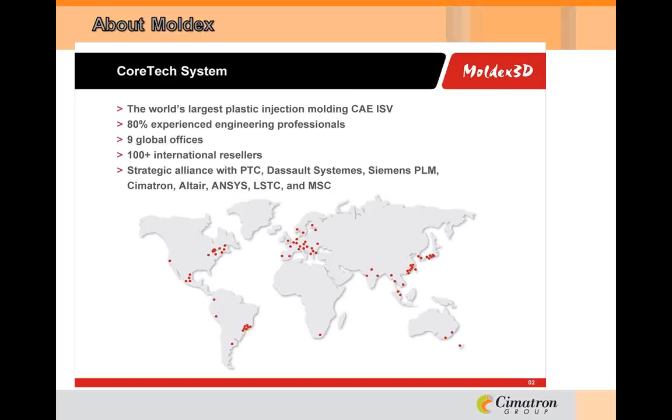Okay, thanks, Ralph. Moldex has a rich history of innovation and growth as a true industry leader. After combining various resources from academics, industry specialists, and customers, the predecessor of Moldex 3D was first released in the early 90s. It is believed to be the world's first CAE program to run on a Windows platform. In 2004, Moldex 3D was the first injection molding CAE to support parallel computing.

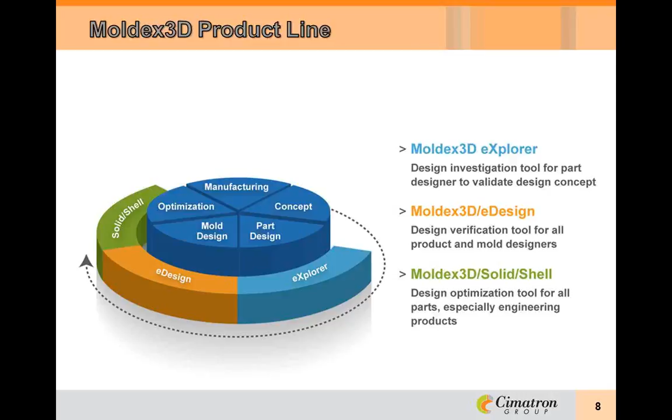Moldex 3D has 3 products that cover a wide range of CAE needs. Starting with Explorer, we provide product designers with CAD-embedded tools for exploring various design concepts. When designing molds, eDesign offers mold designers an easy-to-use interface with accurate computations to verify complex runners, gating systems, and cooling channels, as well as predicting warp and other defects during the molding process. Moldex 3D Solid Shell offers more advanced tools to decrease your product-to-market time and to improve the quality of the design with comprehensive analysis results. Today's focus will be on the mainstream product, eDesign.

These 3 products present a single unified platform for all designers and CAE specialists at every stage of the product development cycle. It integrates all of your innovation, efficiency, and productivity to reach your design expectation and product optimization.

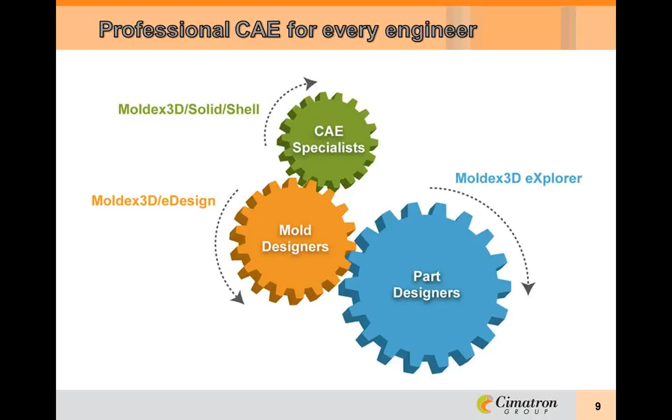In the design phase, there are several often difficult key decisions which product designers must make. For example, how to design the proper wall thickness and how to deal with thin wall products. What potential defects will be found during the tool design and molding process? These questions are extremely complicated and frustrating for product designers. What's worse is that they often do not have any tools to prove out their design concepts. Many times, the only way out for them is to hold the tool builder responsible for these corrections.

My background is tooling, and I happen to know the tooling guys are so nice, they often do this for free anyhow, right? The truth is, these problems should have been solved before the mold design phase. The reality is, both of them definitely need to think about these issues.

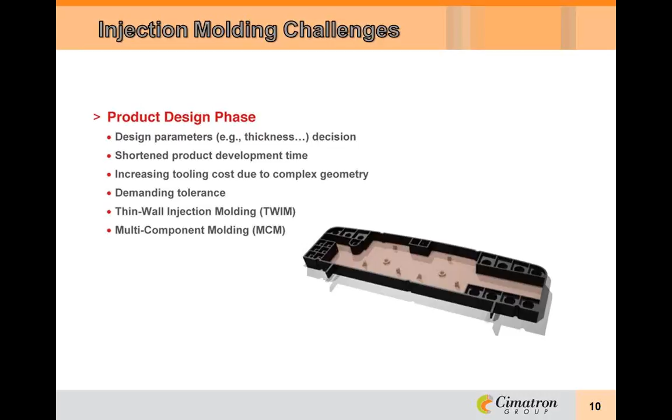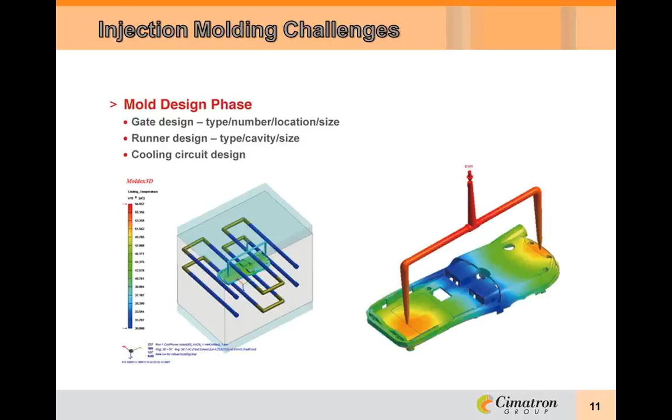The primary tasks of an injection mold include the accommodation and distribution of the melt, precise temperature control to properly solidify the material, and ejection of the molded part. Additionally, a mold has to provide good tooling or steel conditions and mechanical functions such as slides and lifters, all while holding tight tolerances on the part after the warpage and shrinkage of the solidification of the material. This places an enormous challenge on the mold designer. eDesign supplies the tools to help evaluate the size and layout of the runner system, gate location and type, adequate cooling circuit, and appropriate number of cavities.

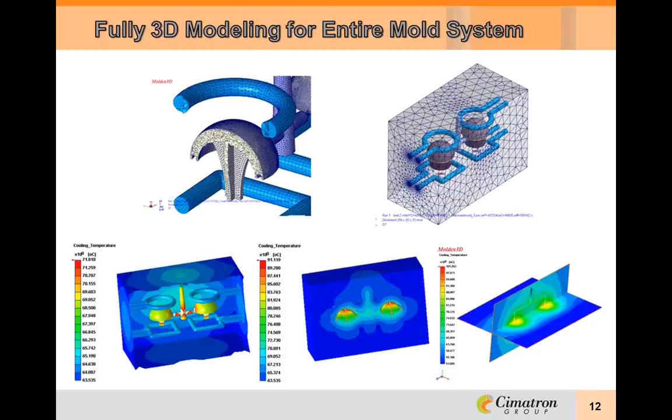Taking some of the guesswork out of the design process is made further efficient since eDesign can take CAD data directly from your 3D mold design in order to simulate the actual process conditions before any steel is ever cut. As you will see later in this presentation, with parallel computing ability and the few required steps to get to the simulation, you will see that there is very little time invested for maximum return of prediction and knowledge.

In addition to the challenges that I just mentioned, under the best of conditions even, injection molding is still a complex technology that also introduces these challenges. If not handled properly, there may exist various flaws either by defects in the mold or improper mold process settings. And here we see examples of a short shot. Of course, a short shot is a molded part that's not completely filled.

Burn marks, black or brown burnt areas on the part, usually located at the furthest point from the gate where the air is trapped. A weld line, also known as a knit line, where the flow front meets. Sink marks, which would be localized depressions, usually in the thicker areas of the part. Warpage, which of course is just the part that's been distorted during the shrinking process. And flash, which would be excessive material, usually in thin layers that leak out at the parting line and of course exceed the normal part geometry.

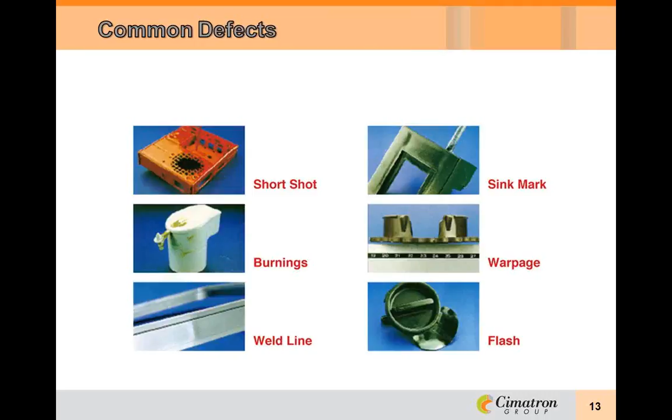With the CAE approach, a process simulation is launched before the prototype mold is ever constructed. In other words, prototyping is done on the computer. In the design phase, a part designer evaluates the influence of material selection and processing on the various part specifications. The analysis is based on physics principles and actual conditions, rather than a rough estimate from handbooks. Part wall thickness can be optimized to facilitate its processing feasibility and product performance. Part design is very flexible since the real mold has not been built yet.

In the mold design phase, the design is further refined by adding molding considerations. Runner system and gate are designed according to the process dynamics simulation. Cooling system is optimized to shorten the cycle time and improve part quality. The molding trial on the computer is possible before the actual molding trial is ever conducted. In this way, mold construction has not begun until the molding trials on the computer meet the requirements. The interrelation of part design, material selection, part performance, and processing is all taken into account. Modification of part design and mold design is flexible and concurrent.

After the mold design is accomplished, the mold is constructed and actual molding trials are conducted to evaluate the mold's feasibility. The time and materials, also known as money, used in molding trials and part testing are minimized since the design has been comprehensively evaluated. Production can then begin and the product development is finished.

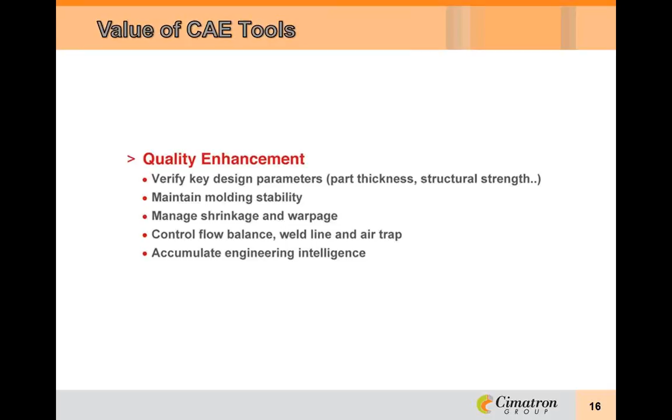In fact, unprecedented global competition is pressing industries to meet various customer demands for better quality, lower cost, eco-friendliness, and so on. People keep looking for more cost-effective and smarter ways to improve the efficiency and profitability. Finding problems and learning solutions from trial and error is a traditional approach and very cost-consuming. To effectively eliminate uncertainty and associated financial losses, an efficient engineering tool becomes more and more necessary to increase competitiveness.

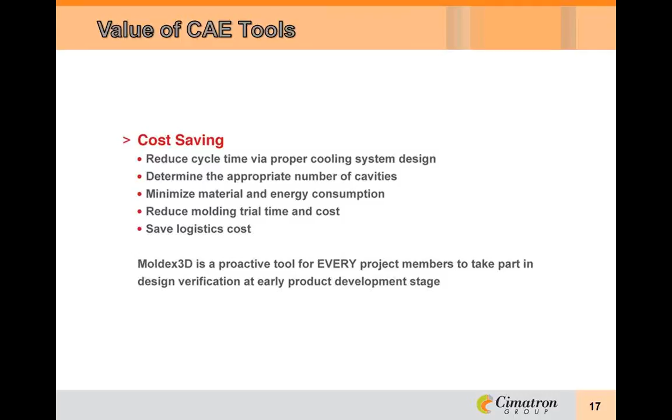By simulating the filling process of injection molded parts, Moldex3D ensures both originality and manufacturability in the design and molding phase. Design teams can easily use Moldex3D as a collaborative tool to identify potential problems and solutions.

Although Moldex3D is incredibly powerful and accurate, it is surprising how easy it is to use. There is no mesh preparation. The part model is simply imported as an STL, and the mesh is generated automatically. The runner and gates can be drawn in eDesign or imported either as STL or wireframe, which would permit parametric attributes to be assigned inside eDesign, which means that the runner, gates, and water circuit diameters can all be modified without the need for data exchange.

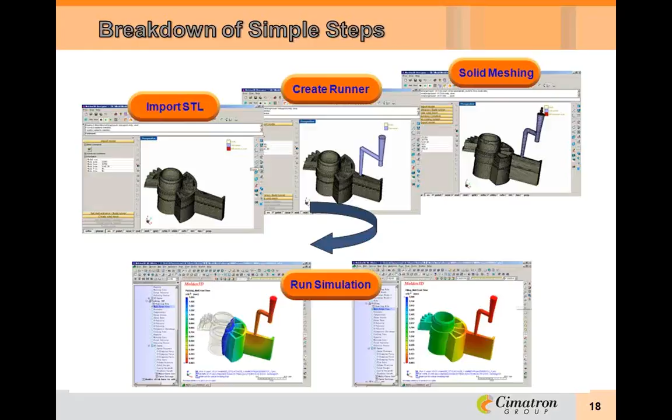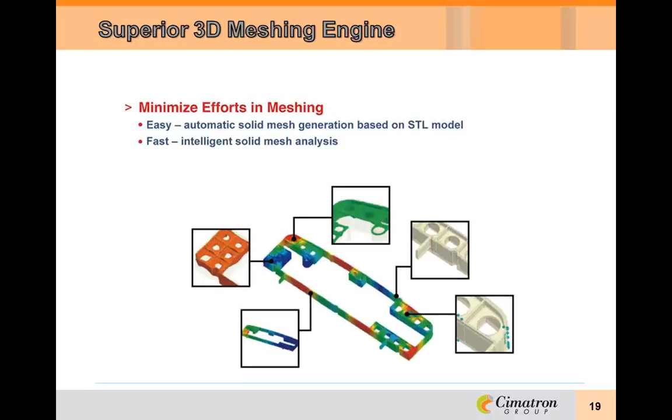eDesign provides the most friendly pre-process environment. The most advanced meshing technology is employed to help users generate true 3D solid mesh of outstanding quality without the need for any pre-process work.

eDesign Runner Wizard provides powerful yet intelligent guidance for your design. Now you can define runner systems and optimize the mold design with ease.

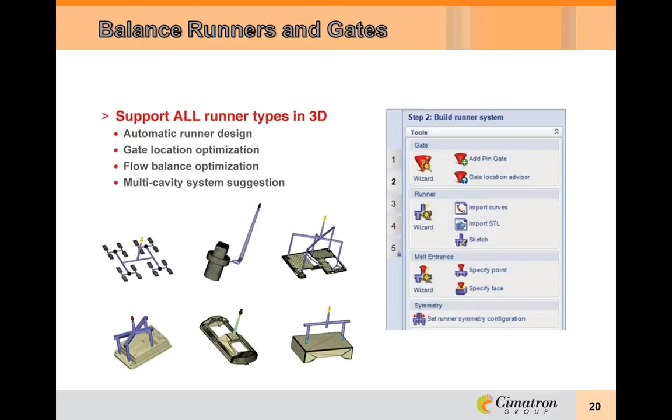eDesign also offers a cooling channel wizard. Users can quickly define the cooling circuit and configure it inside eDesign as an alternative to importing it from another CAD system. More advanced options are also available to enable customization according to the user's requirements, to automate the creation of an entire cooling system and subsequently speed up the optimization.

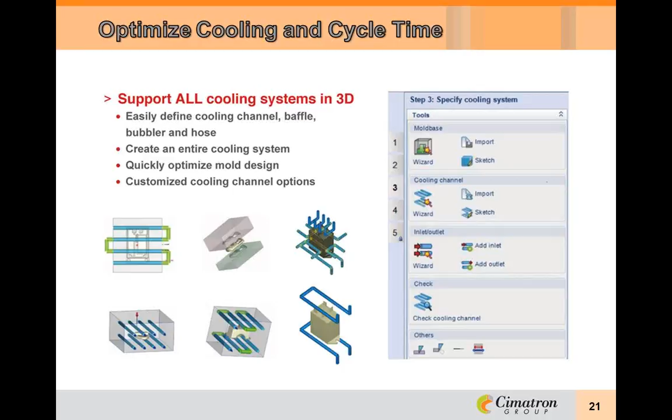Next, let's have a closer look at the Moldex 3D modules. Moldex 3D standard modules are flow, pack, cool, and warp. Advanced modules are fiber, multi-component molding, hereafter referred to as MCM, reactive injection molding, optics, viscoelasticity, and injection compression molding.

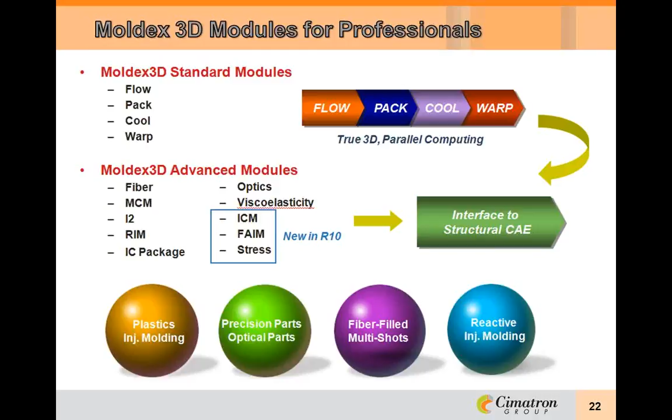Moldex3D Flow gives you accurate insight into solid plastic flow behaviors from a macro view to a micro view, such as fountain flow, inertia effect, and gravity effect. Users can better understand how the solid melt flow progresses, accurately identify where the knit lines are, and examine short shot problems. If more than one gate is used to fill a part, you will see in different colors the material contribution from each gate and where they meet.

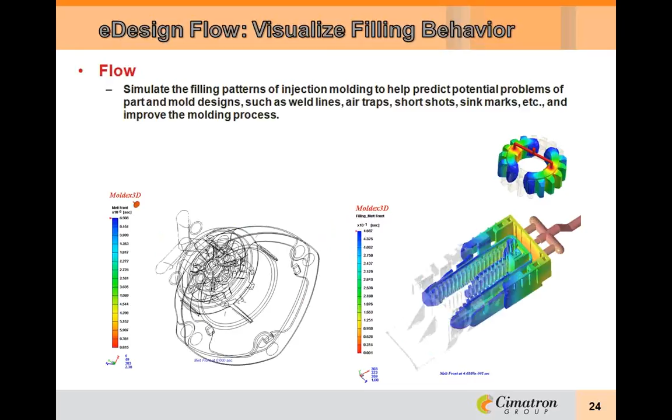eDesign Pack incorporates material compressibility, or PVT, change to account for the density variation and melt flow behaviors in the packing process for thermoplastic materials. Its true 3D technology can help you precisely determine gate freeze time, efficient packing time, and proper packing pressure to minimize areas of high volumetric shrinkage.

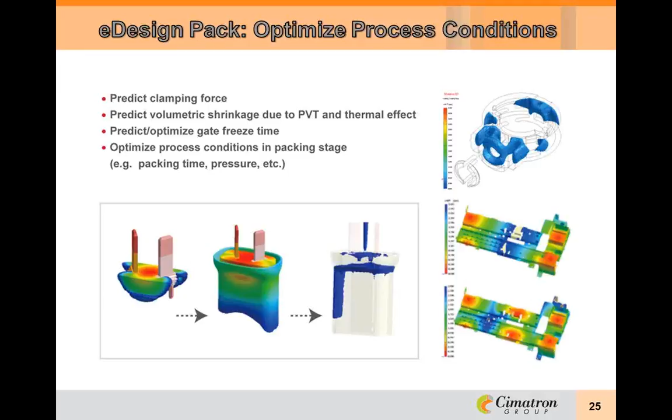Here we can see the packing volumetric shrinkage.

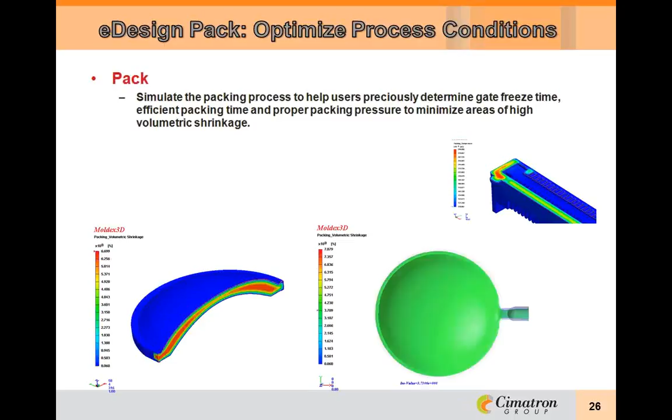eDesign Cool, with its true 3D analytical core, can accurately analyze the mold temperature, the efficiency of cooling channel layout, and the required cooling time in the design phase. It is a useful tool to detect potential defects in the mold cooling system, such as unbalanced cooling, hot spots, and prolonged cooling time due to poor cooling efficiency.

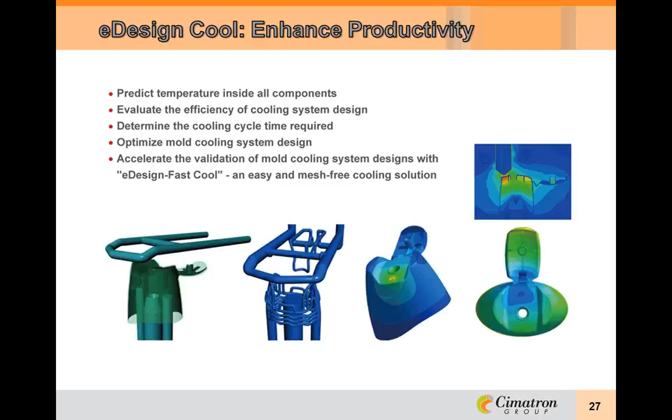You can accurately evaluate the cooling efficiency to further optimize the cooling system and reduce cycle time. Here we see dynamic slicing through the part in order to look for hot spots in the part. This will help us fully evaluate the cooling system.

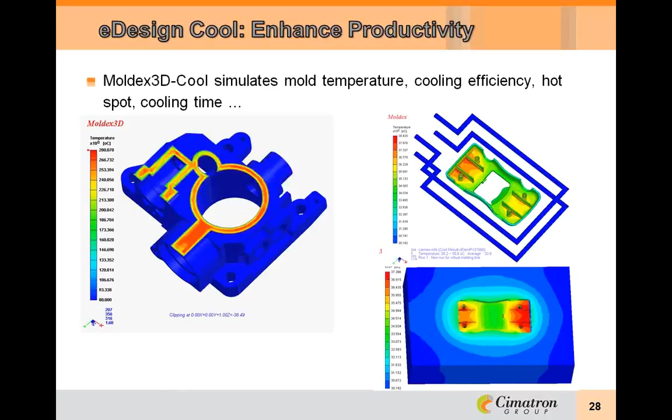eDesign Warp provides users a true 3D simulation tool to anatomize the causes of shrinkage and warpage and further control these defects before the mold is built. You can easily and efficiently improve the part quality and optimize design.

For fiber-filled material, eDesign Warp incorporates fiber composite theories and the fiber orientation results from eDesign Fiber to predict its anisotropic shrinkage and warpage.

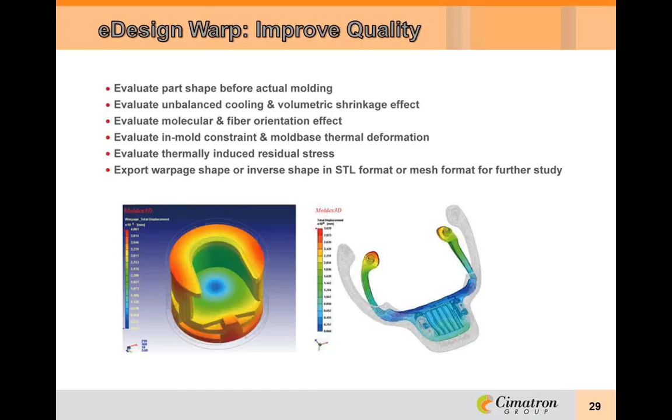Here we can see a scaled-up animation of the warpage behavior. I can't help but think of a specific automotive headliner part that I worked on just a few years back that could have really benefited from this kind of prediction. We knew it was going to warp, and we tried to cut the steel safe, but as I recall, I think that we recut that mold at least 4 times before we finally produced a part within spec.

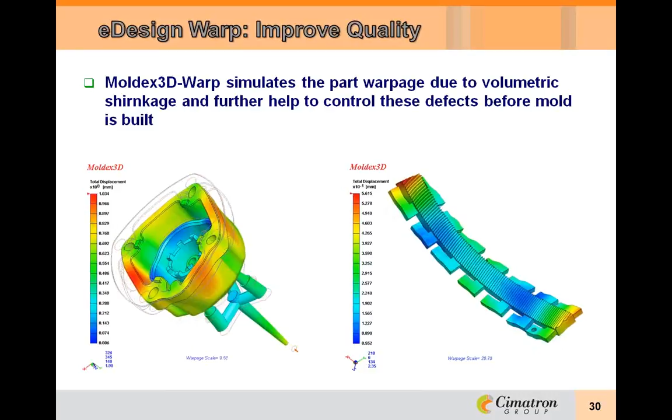Moldex3D Fiber accurately simulates the 3D fiber orientation in the mold filling process and further calculates the process-induced anisotropic thermomechanical properties of fiber-reinforced plastic parts.

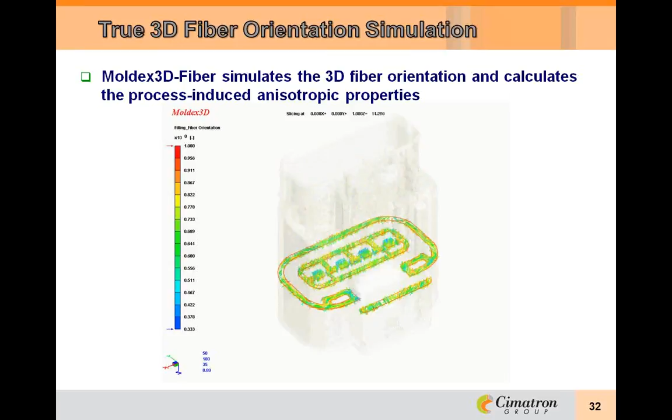Users can understand the 3D orientation of fiber and further control the anisotropic shrinkage of fiber-reinforced parts. Here again, we see dynamic sectioning of the part in order to better understand the fiber orientation. Here we can see the type of influence that fiber has when producing this part.

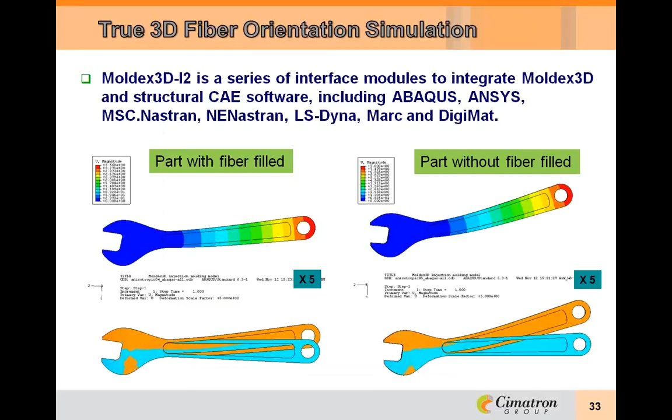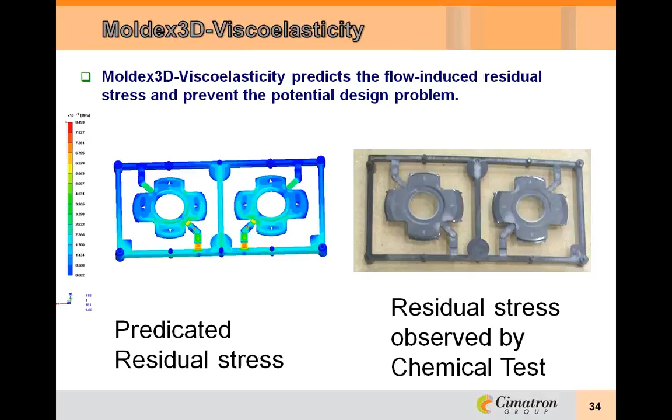eDesign multi-component molding gives you a powerful tool to accurately analyze the interaction of different components and further optimize product design. Users can freely model any kind of metal or plastic inserts and perform comprehensive analysis.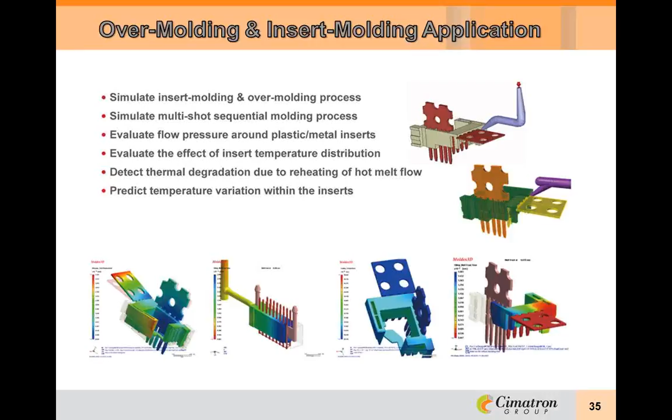With eDesign MCM, you can predict the prolonged cooling time, asymmetric shrinkage, and two-color or overmolding processes, and consider warpage of the different material combinations.

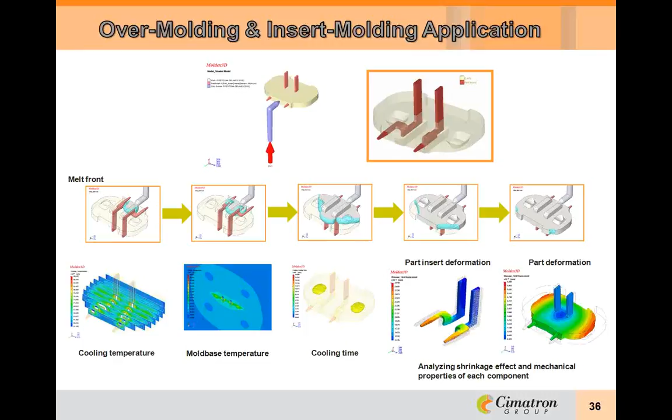Here is an example of the MCM where it's looking at steel inserts around the plastic and checking them for deformation.

Here's another animation that shows the warpage behavior during the overmolding process.

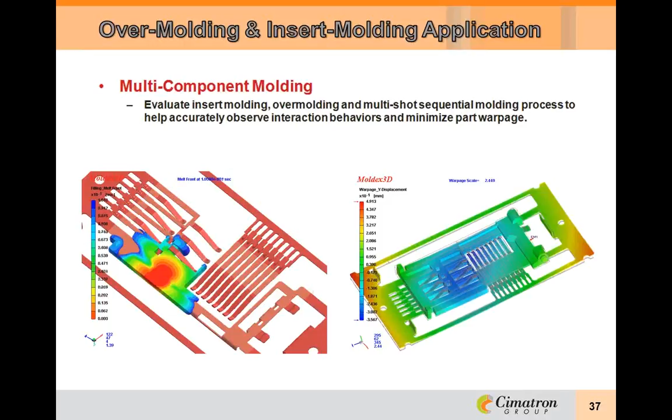Moldex3D is the only CAE solution which supports parallel computing for flow, pack, cool, warp, fiber, MCM, and so on. By utilizing the strength of multi-core computers, the time required for analysis is greatly shortened. Moldex3D parallel computing technology supports PC clusters as well.

Here we can see another demonstration of the software's accurate prediction of what looks like a venting issue. Here we can see progressive short shots and accurate prediction of the filling pattern.

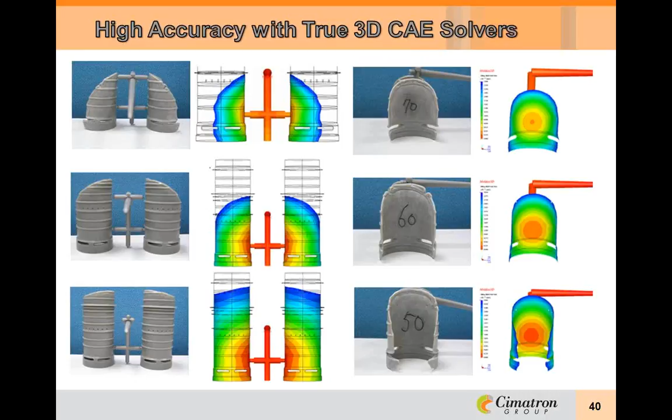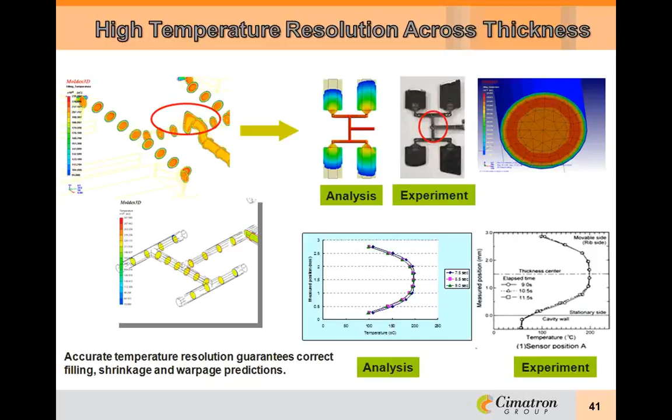Moldex3D not only simulates the part in true 3D, but also the runner system. You might question why this is important. The reason is because of what is called the shear heating phenomenon. While the material is flowing through the runner system, friction is creating heat. This heat does have an impact on material flow, and the next few slides will demonstrate this.

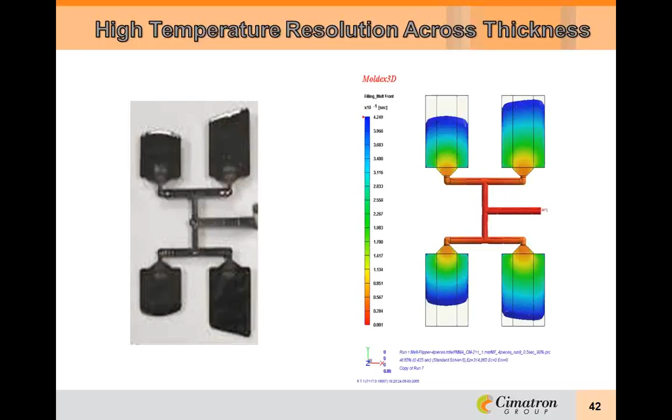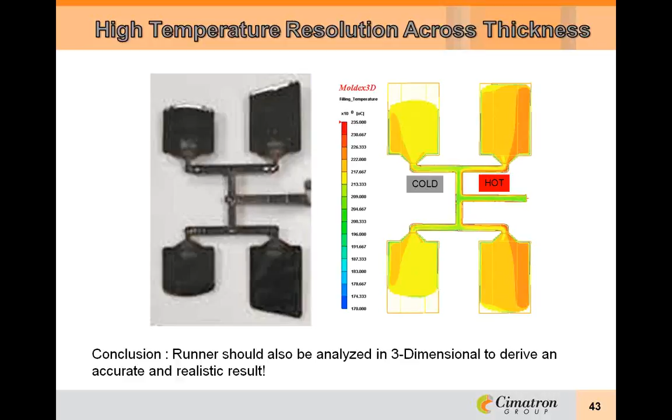The picture on the left is the left half of an actual shot of an 8-cavity mold. The simulation picture on the right predicted it due to temperature influence from the runner. You can see where it says cold and hot; that temperature difference causes the inner cavities to fill faster. So the conclusion here is that the runner should also be analyzed in 3D to derive an accurate and realistic result.

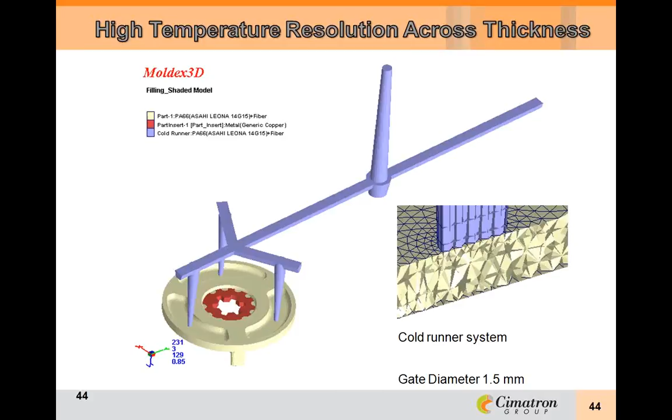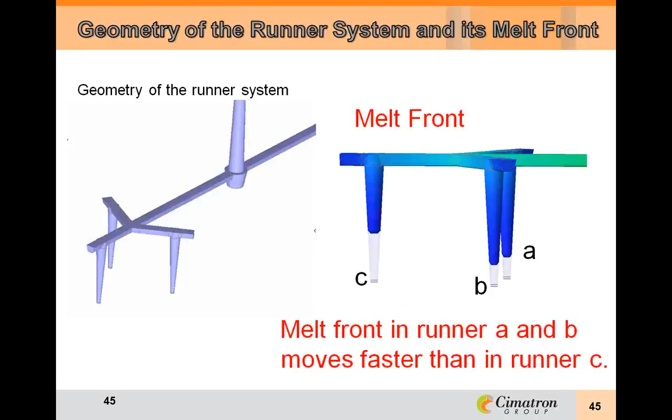Here again we see the accurate prediction of flow pattern when compared to the real molded parts. This could only be achieved by calculating the shear heating in the runner system. These are the kinds of variables that are often not considered in traditional mold designs and cannot be predicted accurately without 3D CAE software.

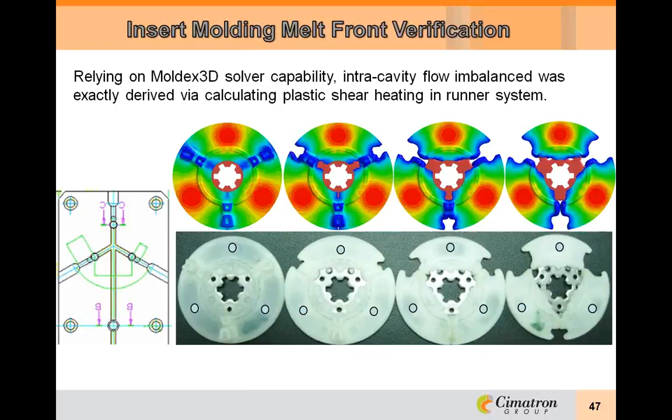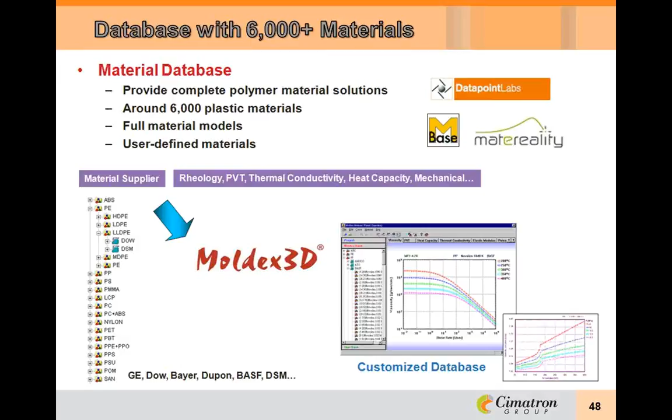An extensive material database comes standard with Moldex3D. Any materials that are not in the database can be added easily.

Best-in-class technical support can be accessed globally. The North American office is in Novi, Michigan.

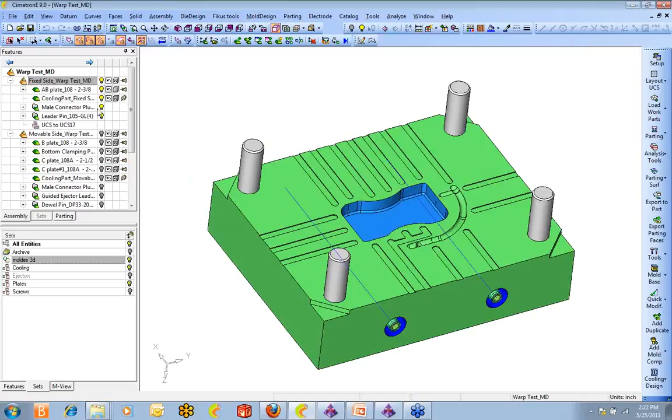Okay, next let's take a look at some examples. The first thing that I want to show is what I started with in Cimatron. I have a 3D mold design here, and let me turn a few things off and on real quick.

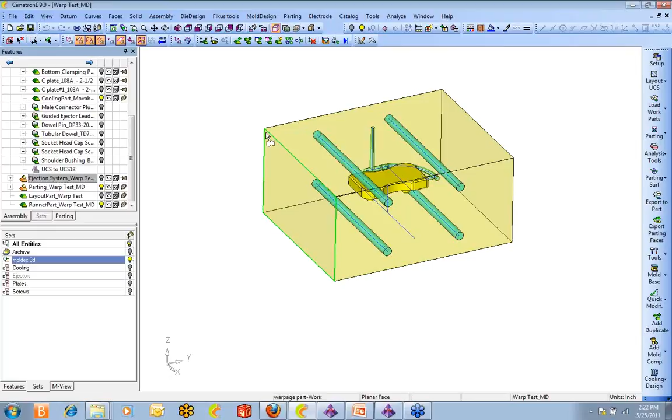All right, so I've got a 3D design ready, but what I'm actually going to take into Moldex is this. I'm taking a bounding box that represents the A plate and the B plate, the cooling circuit, of course the part, and the runner system. But in this case, I only took the wire frame. The only thing I took as an STL was the part, and everything else was wireframe in order to set the parametric attributes inside eDesign.

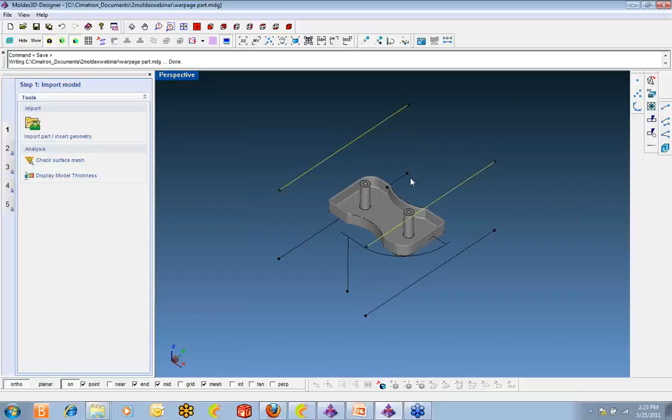Let's take a look at that. Okay, so here in eDesign, we have the part that I brought in as an STL, and of course the wireframe. So I'm going to pick on the cooling circuits first, and we're going to assign an attribute as a cooling channel, 0.438 inch diameter.

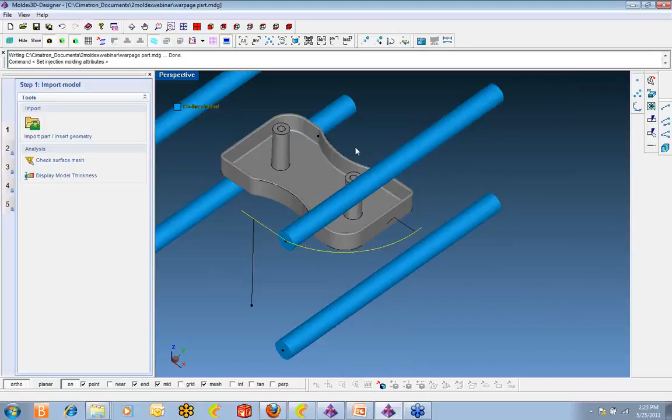And next, let's take the runner. We're going to assign the attribute of cold runner, and this diameter will be 0.250. And this one also is a cold runner; the diameter is 0.188. This one as well. And lastly will be the gate.

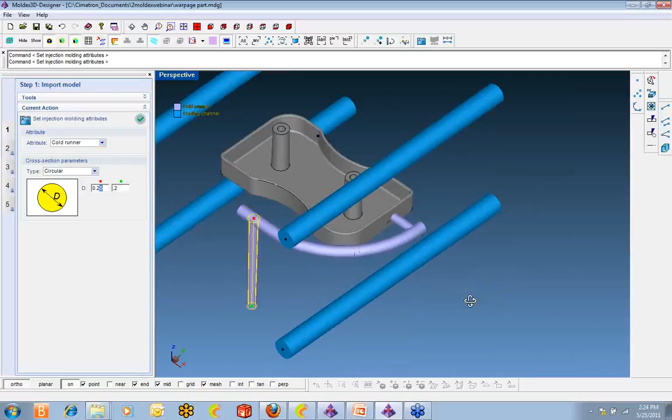Okay, and now we're going to just go through some of these steps. Yeah, I forgot the melt entrance. And the mold base—the mold base, again, is just a size representation of the A and the B plate.

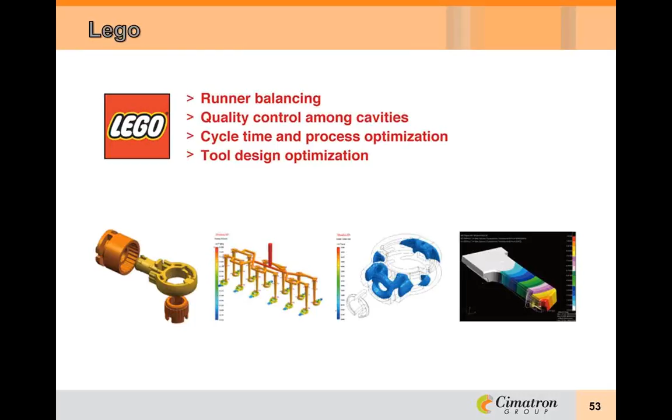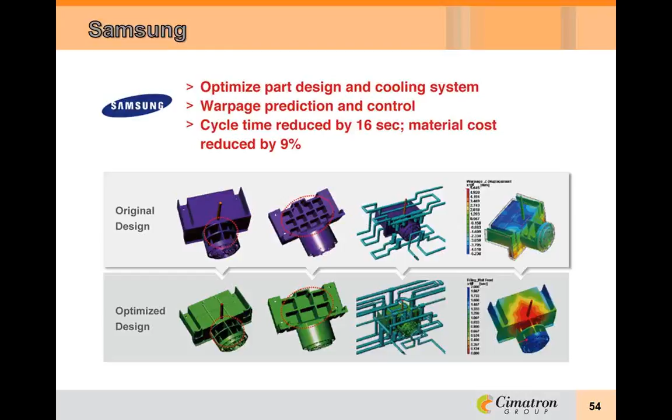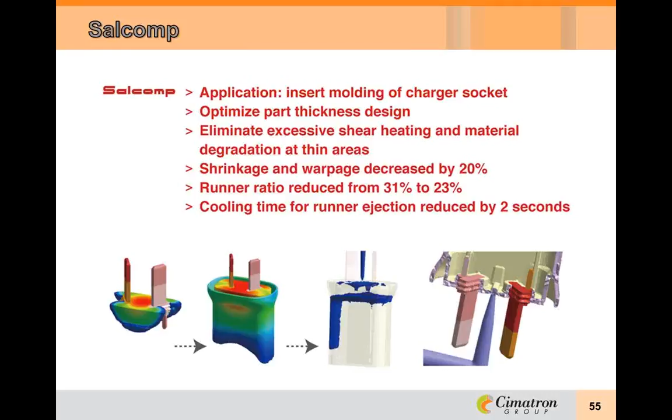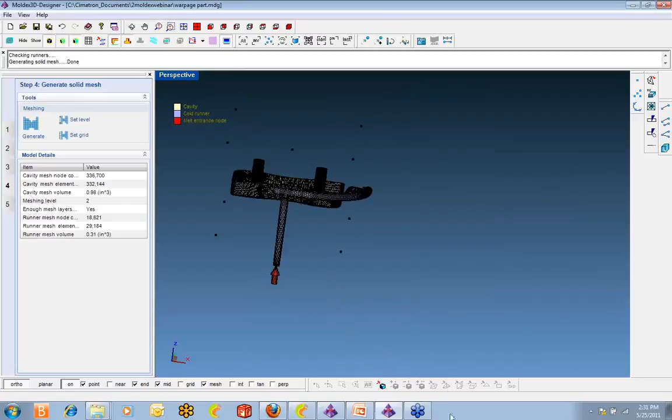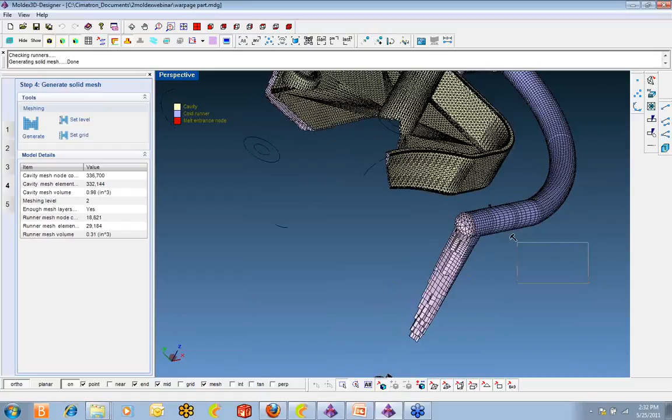Okay, so we're going back into the eDesign, and we're going to look at the mesh that was created automatically, and I'm going to dynamically clip across the mesh and show you what it looks like. Here you can see the 3D filling inside of the mesh as we clip it away. And of course, the runner is also done in 3D.

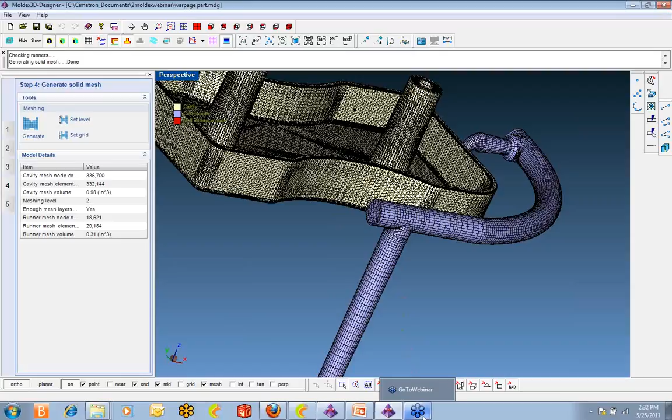So there's really nothing more to do with this one other than save it and take it into the project. And that's what I'm going to do now is open the project. Now, we actually did do 2 different runs with this part. I want to show a few things on run number 1, and then we'll talk about what we changed, and then I'll show you run number 2. So first, let me go to run number 1.

I'm going to click on filling, and we're going to view the filling pattern in this model. What we're going to be looking for is temperature problems and warpage in this run. Okay, so let's have a look at the filling pattern.

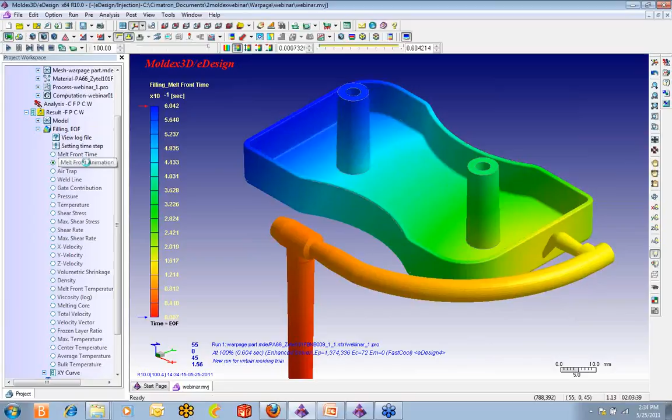Next, we'll look at the melt front animation. And this will show us the air traps.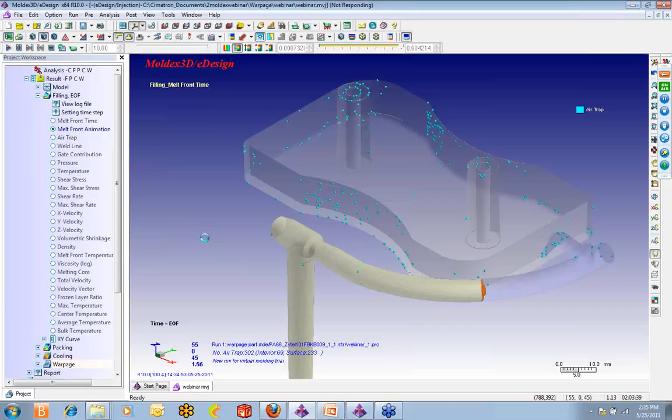Next, we're going to look at warpage. Here you can see the X displacement, X being the longer axis. On the chart, we're talking about 1.6 millimeters. So this part is not being adequately cooled, and therefore there's much more deformation than we would like to see.

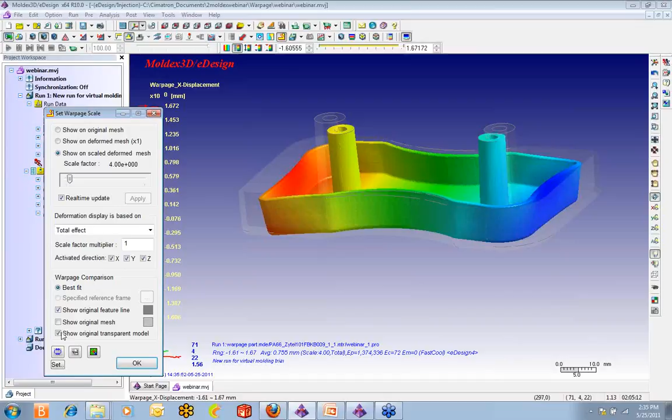We can animate this one as well to exaggerate what that looks like. You can see how the part will shrink and warp.

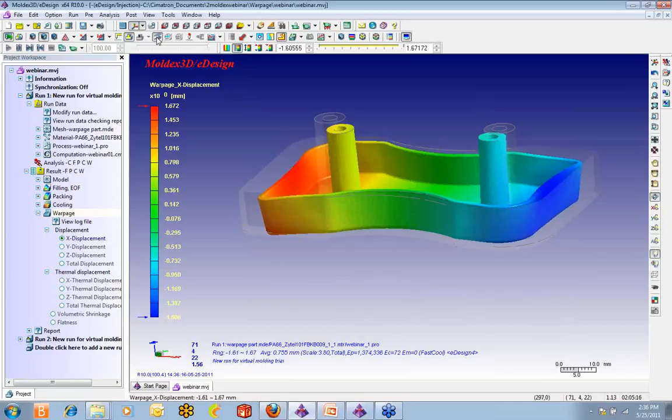Okay, now let's have a look at the cooling lines on this one. You can see that we don't have any cooling in the center of the part. In fact, we'll have a look at the temperature range real quick before we go into the second run.

Now, what we really want to look for on this part is a difference in heat from the inside of the part to the outside of the part. You'll notice that the back side of the part is blue and green, ranging from 90 to 100, and the top of the part is more yellow, which is like 120. So it's a pretty big difference, and potentially a problem. Well, evidently it's a problem because we're seeing it in the warping stage.

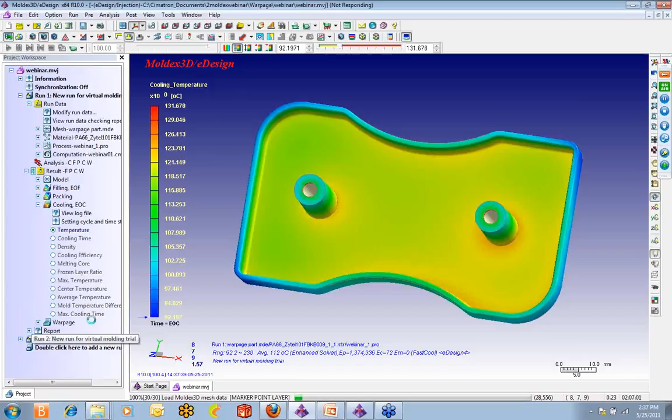So now let's have a look at run 2, and we'll show what we did to improve it. Here in run 2, you can see that we added another line in the baffle to try to bring more cooling closer to the part. So let's have a look at the cooling and see what the difference is with this one.

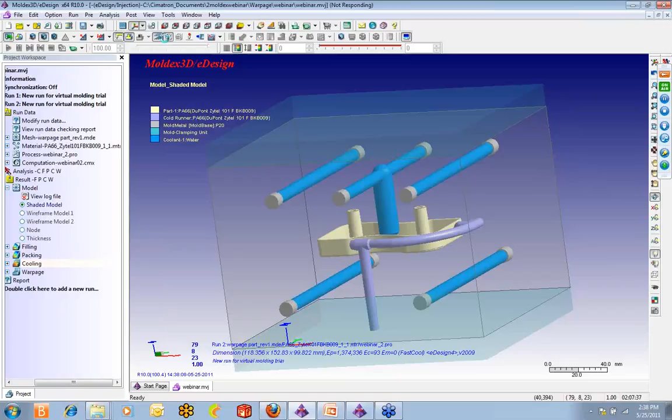Now as we interrogate the temperature, we'll see that there's not as much variation from the bottom of the part to the top of the part, and of course it's being better cooled by the baffle. And now if we consider what the warpage is like as a result, we'll compare the two.

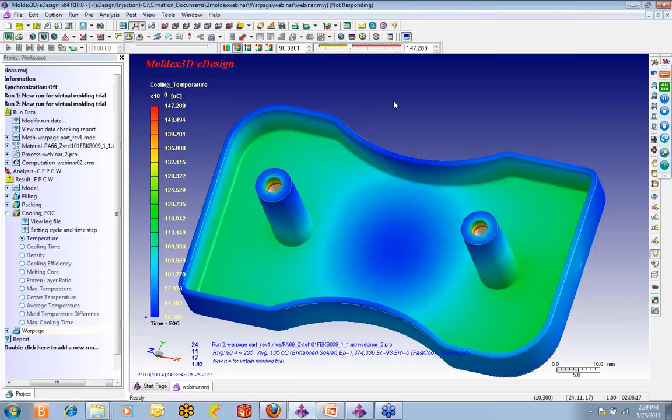Here we can see that at the worst case, we're at 0.25. So we went from 1.5 mil to 1/4 mil in warpage result. It's a dramatic difference.

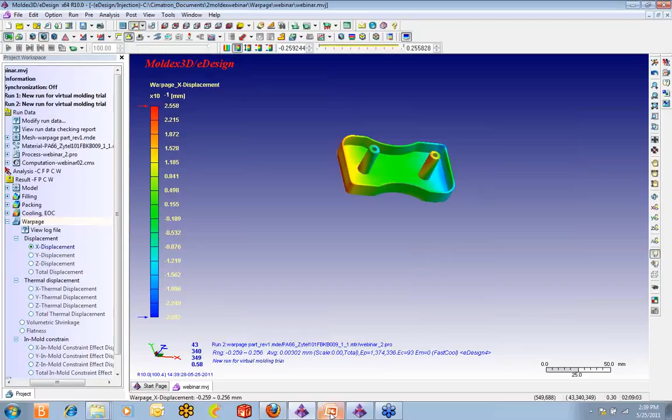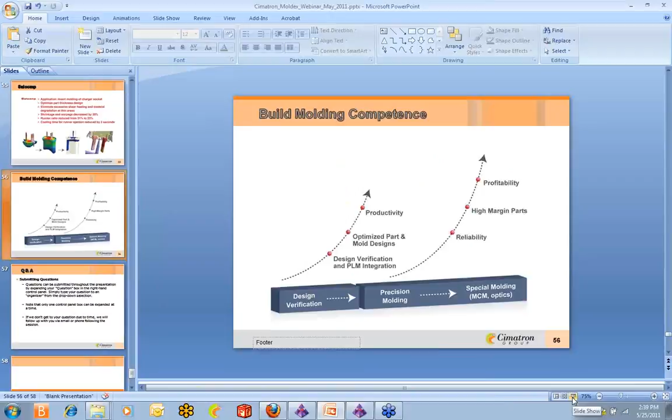All right, now we'll go back to the PowerPoint for a second here. In closing, the concept is simply that if both product and tooling designs are verified early enough in the design stage, it will help to eliminate unknown issues and optimize the entire injection molding process, which leads to higher margins and shorter delivery times. This can become a real competitive advantage over those who decide to stay with the traditional trial and error approach.

For tool makers, there is also the added benefit of being able to provide such a service. For a long time, CAE software was too cost prohibitive for tool shops. Now, however, it is much more affordable and will likely become commonplace in the not too distant future. Cimatron understands this and wants its customers to be on the leading edge of technology, which is why we wanted to bring these ideas to your attention.

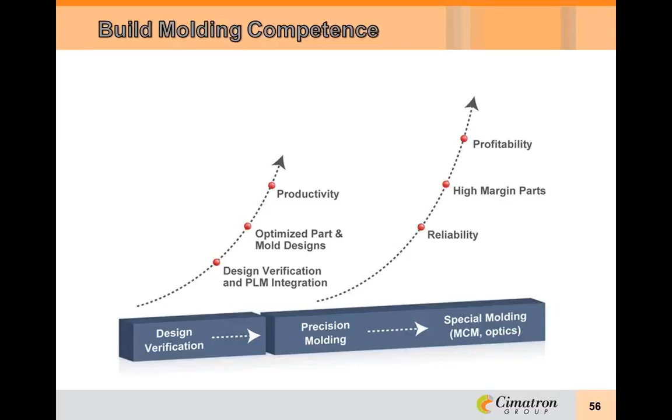Thanks, John. Again, you can simply type in your questions in the right-hand side in the question box. We do have one question: how many users are out there? Again, for Cimatron, there's 40,000 plus. For Moldex, there's over 5,000 worldwide.

Another question we got is, what's the difference between Moldex and Moldflow? Ken, would you like to respond to that? Yes. As you could see during the presentation, we could generate a solid mesh, not only cavity. We are able to generate the runner with a 3D mesh. And using our solvers, we could capture the shear heating phenomena in order to get a good warpage result. This is a very big feature. And meanwhile, we also support parallel computing. So as long as the users could provide us good hardware, then simulation time won't be a problem to simulate 3D mesh.